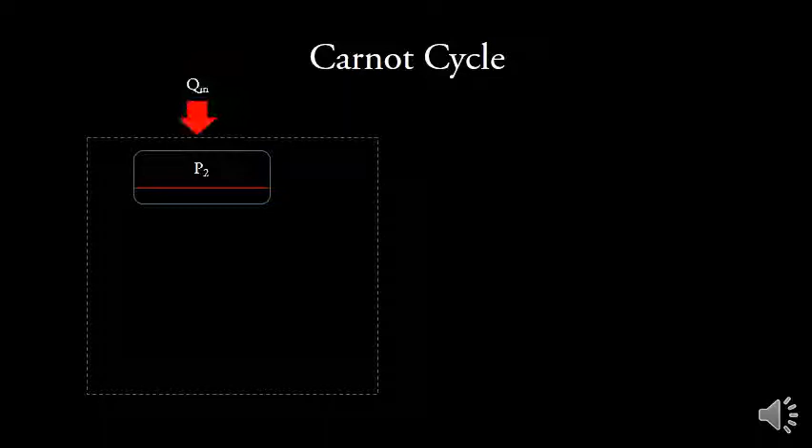gumawa tayo ng ibang mga paraan upang ma-utilize natin ang energy mula sa mga solid fuel, kagaya na lamang ng steam power plant. Sa power plant, meron tayong container. Ilagay natin doon ng tubig, and then susunugin natin ang ating solid fuel, say coal, at ang heat doon ay ating ilagay sa ating boiler.

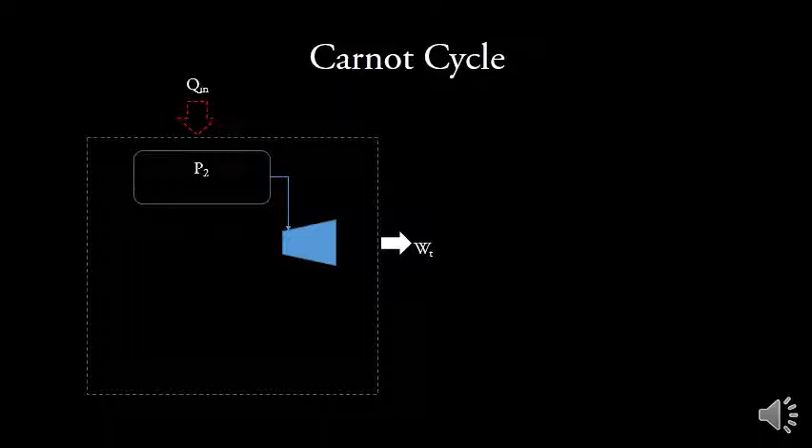So mag-vaporize ang ating water sa loob ng boiler at high pressure P2. Dahil mataas ang pressure na iyan, ay sapat na iyan upang paikutin ang ating turbine. So nag-expand doon sa turbine, and then ang ating turbine ay nag-generate ng work sub T or work ng turbine, and then ang condensate at ang vapor ay ipinunta natin sa ating condenser, kung saan atin naman itong i-condense.

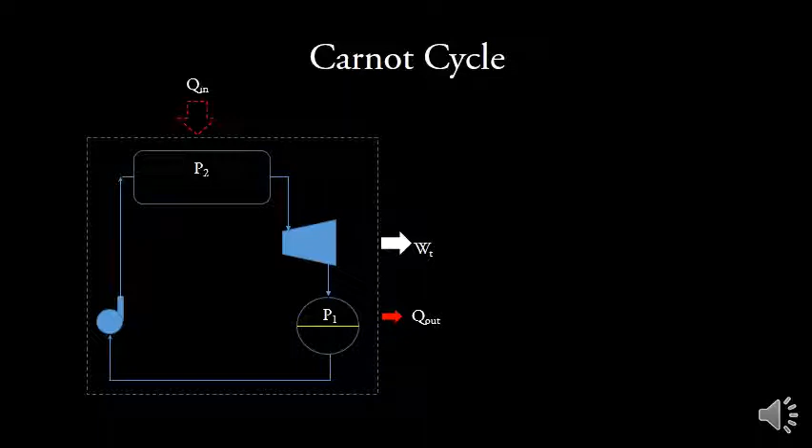Kapag i-condense natin, ibig sabihin hihigupin natin ang heat mula sa loob ng condenser. And then, i-pump natin pabalik ang ating water doon sa ating boiler. Kapag ito ay gumagana according to Carnot cycle, ito ang magiging hitsura nito sa ating TS diagram.

Meron tayong dalawang working pressure, higher pressure side and the lower pressure side. And then, kapag isabihin natin ang state ng water before entering the pump is state 1, sa Carnot cycle natin, it is somewhere here sa TS diagram.

And then, after exiting the pump, lalabas ito as a saturated liquid at point 2. So sa TS diagram, it is a saturated liquid. So tinansya natin na ang ating point 1 is such that after delivering the water to higher pressure, its state is saturated liquid. From point 2 naman, dinagdagan natin ito ng heat at nag-vaporize ang ating tubig from saturated liquid

to saturated vapor at point 3. So at point 3, the state is now saturated vapor. From point 3, in-expand natin ito sa ating turbine. And the turbine generates work, and the state of the water after exiting the turbine is state 4.

Ito po iyon. And then, from point 4 na naman, i-condense natin up to point 1. At point 1, ang state ng water natin is a mixture of liquid and vapor. Majority is condensate, pero meron pang mga vapor. Okay.

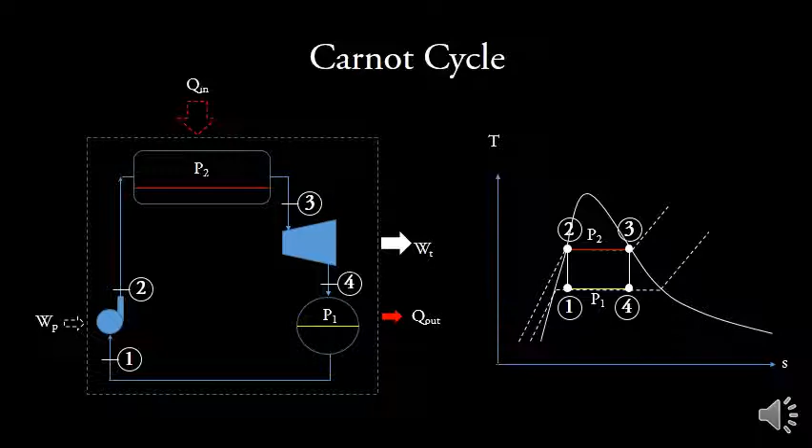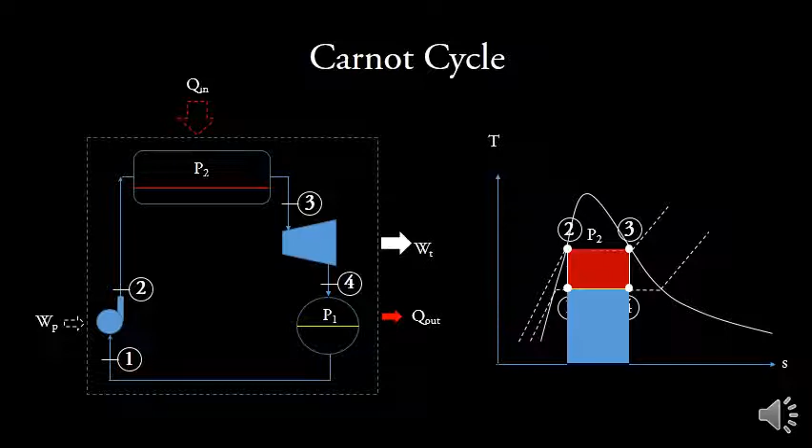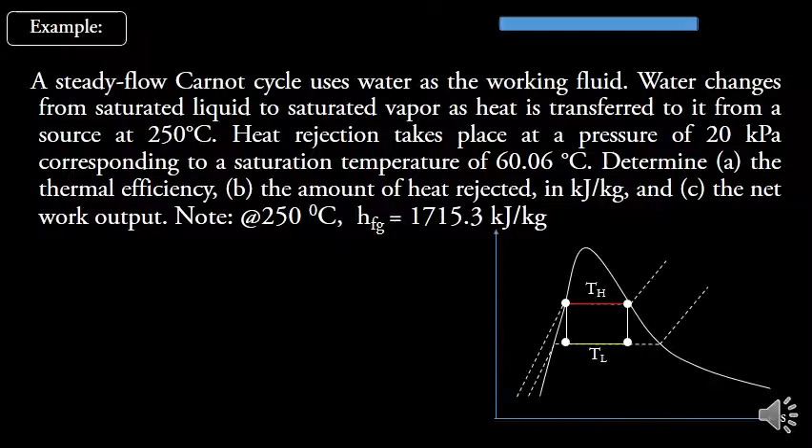Okay, mag-consider tayo dito ng halimbawa, meron tayong Carnot cycle. Ito yung mga proseso natin. Una, ang tanong dito is, ano ang thermal efficiency?

Okay, alam natin ang thermal efficiency ng Carnot cycle is 1 minus TL over TH. Meron tayong higher temperature, 250, at ang lower temperature naman natin is the temperature of the condenser, which is 60.06 degree Celsius. Given this value, ma-determine natin ang efficiency ng ating cycle, which is 36.3%.

Okay. Next is the amount of heat rejected and the net work output. But before that, unahin muna natin ang net work output. Dahil meron tayong efficiency at meron tayong meron tayong heat added.

Ang heat na added natin is the heat added from saturated liquid to saturated vapor. That is HF and HG. The difference of which is HFG. So, ibig sabihin, ang heat added natin is, that is the Q in. Ang value nito ay ang HFG natin, 1715.3 kJ per kilogram. So, makalculate natin ang work net natin, and that is 623 kJ per kilogram.

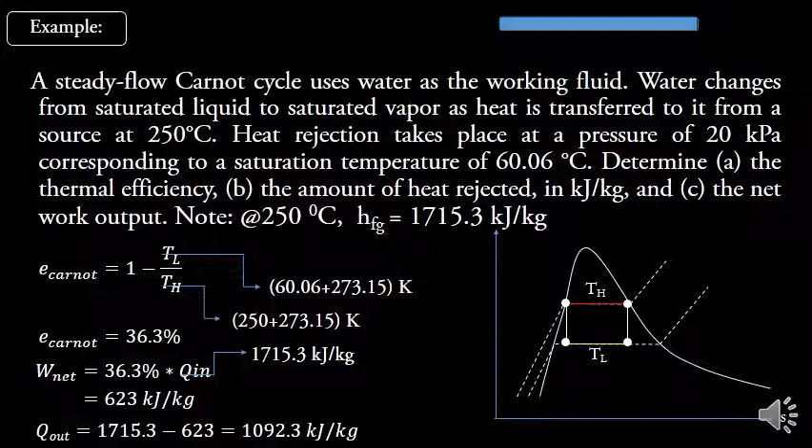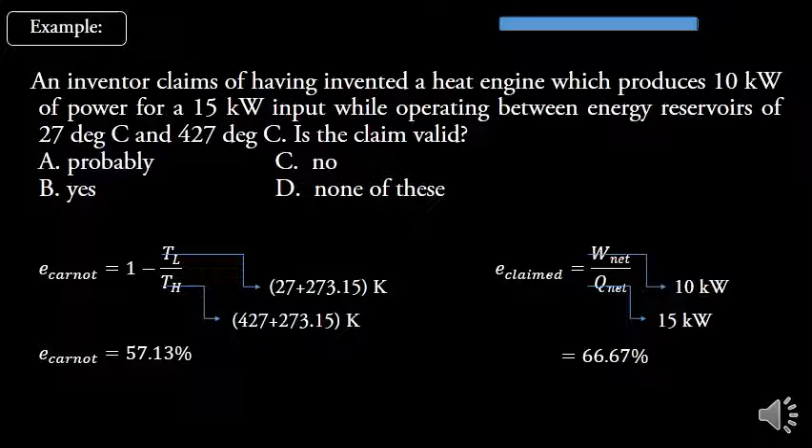Okay, so now let's discuss the Rankine cycle. We just modify our Carnot cycle from earlier, working on steam.

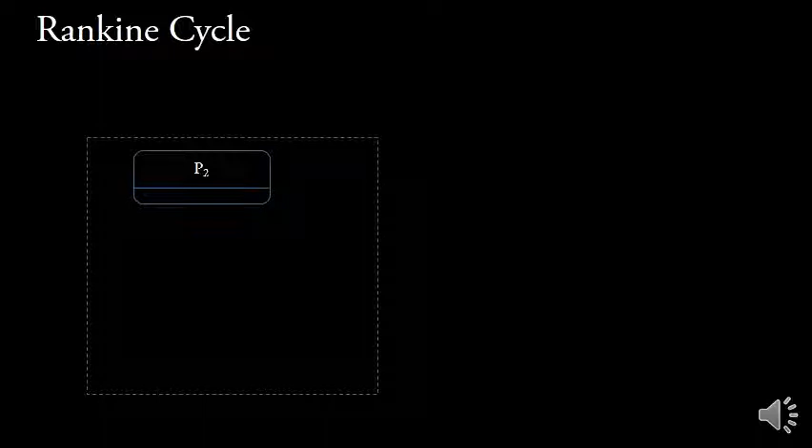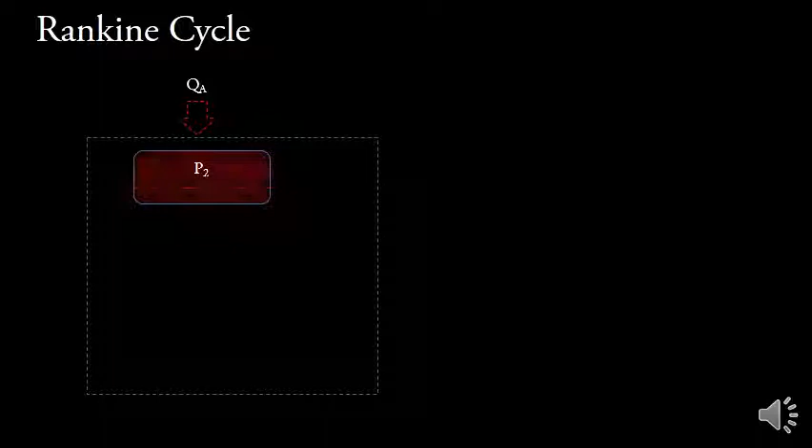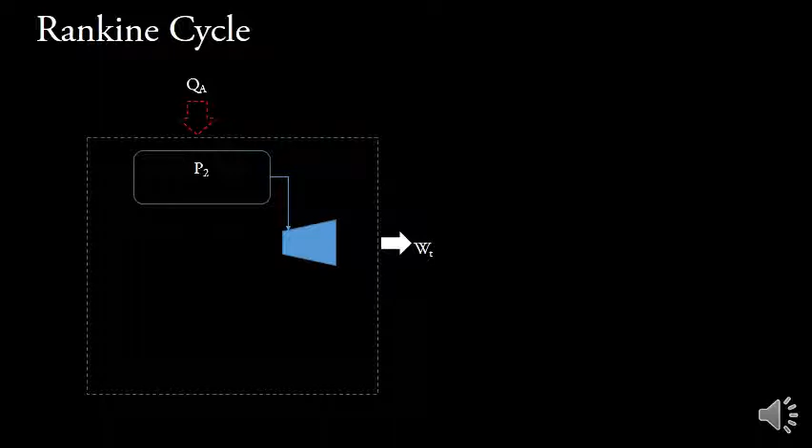Now we still have a boiler, regulated to a maximum pressure P2. We have liquid there, and then we heat it. The temperature rises until it becomes saturated liquid, until it vaporizes, until it becomes superheated vapor. When it becomes superheated vapor, we expand it in the turbine, which causes the turbine to rotate and produce work, WT. Then the vapor is sent to the condenser where we condense it.

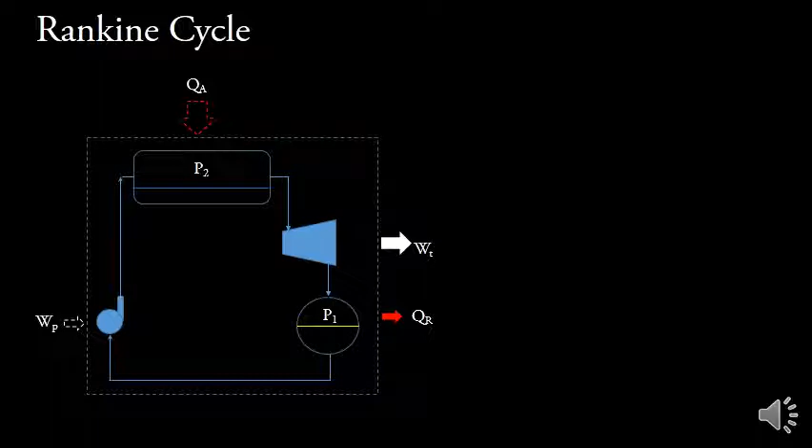Okay, on the TS diagram, this is how our Rankine cycle looks. We have two pressure limits, pressure P2 and pressure P1. Pressure P2 is the pressure in the boiler and pressure P1 is at the condenser. If state 1 is the state before entering the pump, on the TS diagram this is the condensate at pressure P1. From pressure P1, or from point 1, we pump it to a higher pressure. If the process is isentropic, meaning the process is vertical, the line from 1 to 2 is vertical.

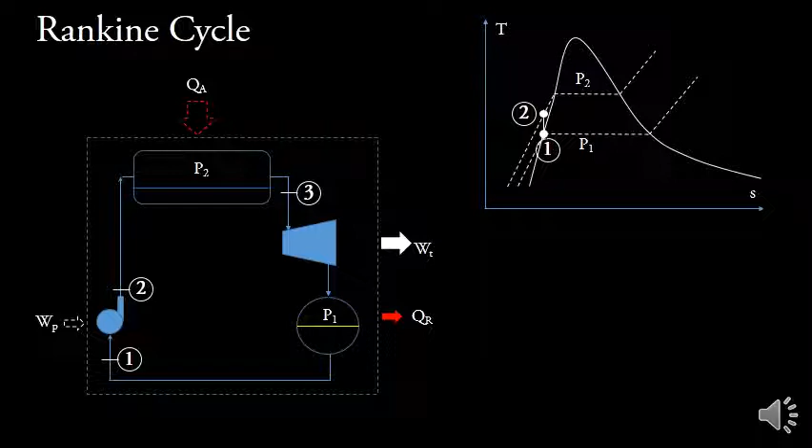After exiting the pump, the state of our water is at state 2, that's the vertical line intersecting the line P2. Then from point 2 to point 3, the water is heated in the boiler. First, the pressure and temperature rise to the saturation temperature of P2, then it vaporizes until it becomes saturated vapor, and then becomes superheated vapor. Then, once it becomes superheated vapor, we expand it in the turbine, which generates work.

Then at point 4, it could be a mixture of vapor and liquid or purely superheated vapor. Then from point 4, we condense our mixture into pure saturated liquid, or if possible, it should be subcooled liquid before we pump it to the boiler.

Okay, so let's determine the values we need to compute here. First, what is the output of the plant? But before that, let's first compute the other work done, such as the work of the pump. The work of the pump is mass times V dP, that is the work by the pump.

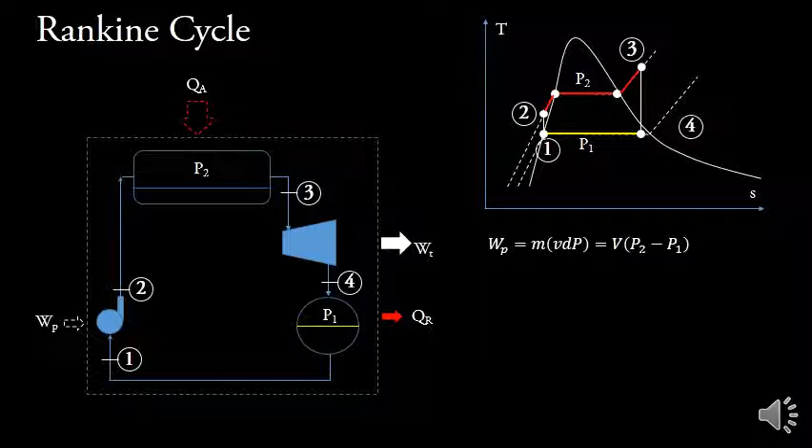Or we can rewrite this as, since mass times specific volume is total volume, we have capital V, and dP is the difference in the pressure, high pressure and low pressure, that's P2 minus P1. And the heat added is the change in enthalpy from point 3 and 2, so H3 minus H2 times the mass of the water.

Okay, what is the value of our H2? Unlike H1, which we can find directly in the steam table as the saturated liquid value, at point 2 we can compute it using the enthalpy at point 1 as well. That is the enthalpy at point 1, or the energy at point 1, plus the energy provided to the water by the pump, which is V dP. Our specific volume is the specific volume at point 1.

And then the heat rejected. The rejection process takes place from state 4 to 1, so we have H4 minus H1 times the mass flow rate. And the work of the turbine takes place from state 3 to state 4, we have H3 minus H4 times the mass flow rate of the water. Then we'll have the work net to be the work of the turbine less the work of the pump. And the efficiency can be calculated by work net over Q added.

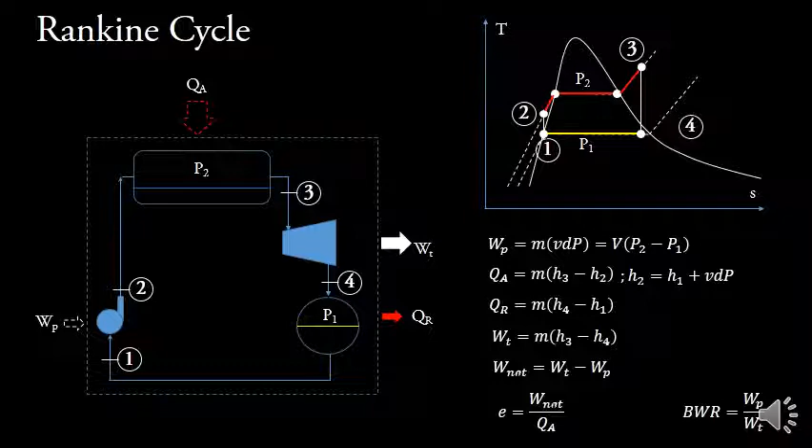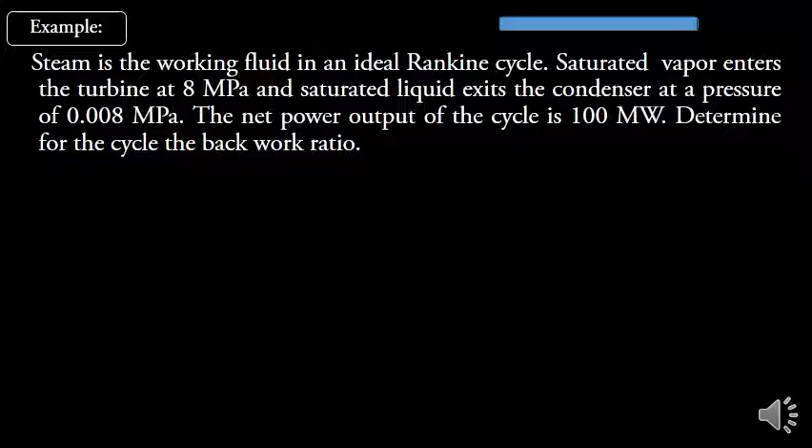Okay, i-determine natin ang back work ratio. So, back work ratio natin is work of the pump divided by the work of the turbine. So, work of the turbine is M times change in the enthalpy between 3 and 4.

Ang H3 natin is sa saturated vapor state, so titingnan natin kung ano ang kanyang enthalpy. Sakaling walang dalang steam table sa exam, dapat ang mga value na ito ay naibigay. Pero kapag hindi naibigay, ibig sabihin dapat merong naka-attach na steam table. Okay, titingnan natin ang value ng H3 mula doon sa ating steam table.

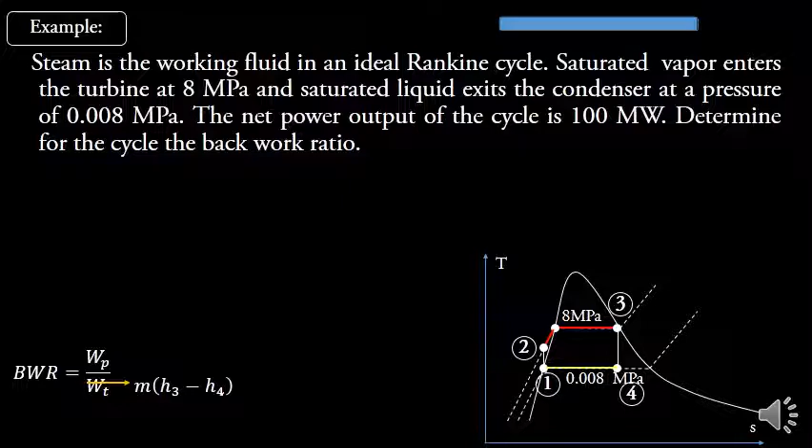Buksan natin ang ating steam table at titingnan natin ang value ng point 3. Ang point 3 natin ay saturated, so pupunta tayo doon sa part ng steam table kung saan merong column ng pressure at temperature na magkatabi. Kapag merong ganon, ibig sabihin, ang table na iyan is for saturated properties. And then, i-identify natin ang pressure or temperature. In this case, pressure na 8 megapascals or 8,000 kilopascals. Okay, ang gusto natin kukunin dito ay ang enthalpy at point 3, which is Hg, this column. Okay, ang value natin ng H3 is 2,774.55.

Okay, maliban dito, i-identify din natin ang isang property dito which is kakailangan natin in the future calculation, 5.7458, entropy natin yan, that is Sg, entropy of the saturated vapor. This correspond to this vertical line sapagkat ang point 3 at point 4 ay magkaparehas na entropy. So that line is 5.7458 na entropy.

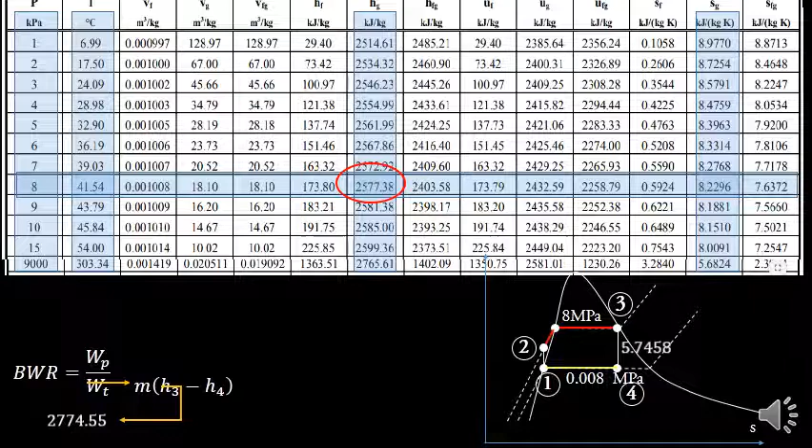Okay, so ang next natin i-identify ay ang H4. Ang H4 natin ay nasa lower pressure na, so binuksan natin ang ating steam table at lower pressure at hinanap natin doon ang 8 kilopascals. Pag titingnan natin ang point 4 natin, ang Hg natin dito is 2577.38. But this is not our point 4, this is the enthalpy of the saturated vapor at that pressure.

Okay, on the other side, meron tayong HF, enthalpy yan ng saturated liquid at that pressure. Okay, pero pag titingnan natin, meron din tayo ditong HFG. Merong ibang mga steam table na walang FG na property. Ang FG is the difference between the G and the F. Sometimes, pinoprovide ito para hindi na tayo mahirapan sa pag-compute. Ang HFG is the difference between Hg and HF.

So, kapag titingnan natin, ang HFG natin is that segment mula sa point 1 hanggang sa point red. So, ang point 4 natin, ang enthalpy, kapag i-compute natin ang enthalpy dyan, it must be the enthalpy at point 1, which is 173.8, plus the fraction of 2403.58. That fraction is called the quality. So, depende sa quality ng ating mixture, we can determine the enthalpy at point 4. So, the enthalpy at point 4 is 173.8 plus a fraction of the total length. Isulat natin dito, that is our H4.

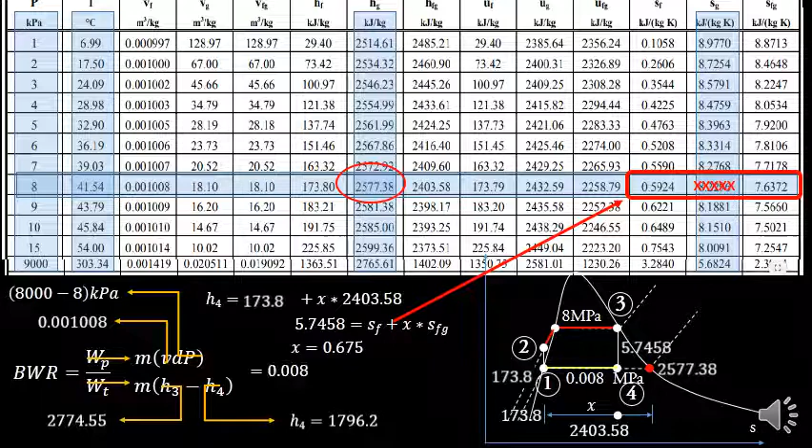Pointing to our steam table at 8 kilopascal, we look at VF, which is the specific volume of the saturated liquid. We have that value, and now our variables are complete. So we eliminate M, and we can compute that the backwork ratio is equal to 0.008.

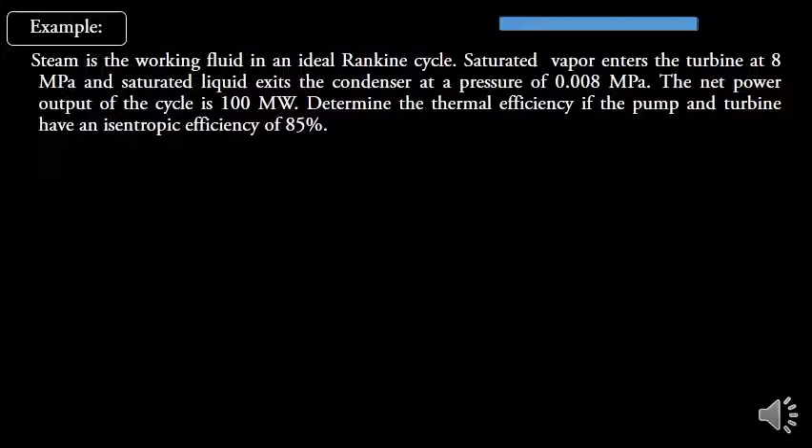So first, let's identify that the pressure difference is 8,000 minus 8, so that is our dP. And we have already identified point 1 with specific volume of 0.001008 and enthalpy of 173.8 from the previous problem. And we have not yet identified point 2, which is equal to H2.

To identify point 2, we have H2 equals enthalpy at point 1 plus specific volume at point 1 times dP. We have H1, we have specific volume, and we have dP, meaning we can calculate our H2. Now at point 3, we have already identified that from the earlier problem, and point 4 also, we've already identified that. Okay, so it's now complete.

We are now ready to compute the thermal efficiency. Thermal efficiency is the work net over Q added. Okay, our work net is already given, it's 100,000 kilowatt. But our QA is not given, but we know it is equal to the mass flow rate times the change in enthalpy between point 3 and point 2.

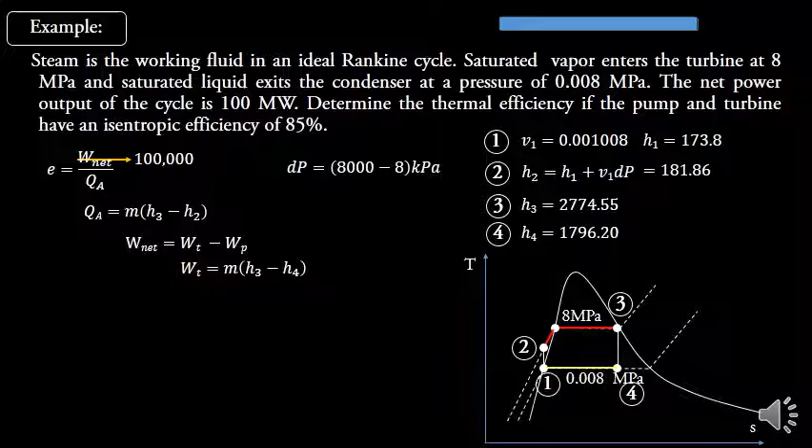But since the turbine is not 100% efficient, it is 85% efficient, its isentropic efficiency. That means only 85% of this energy will be converted into the work of the turbine.

And the work of the pump, the ideal work of the pump is equal to this formula: specific volume at point 1 times dP.

Okay. But because our pump is not 100% efficient, meaning only 85% of the work of the pump is converted into the energy of the water. Notice that our efficiencies here are not in the same position.

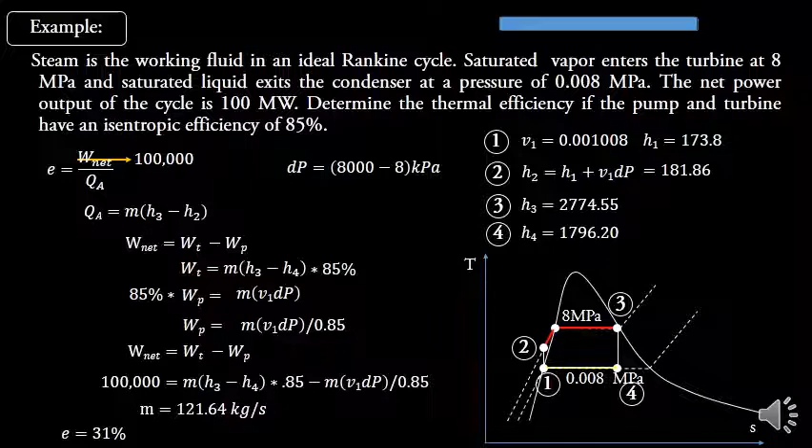And substituting everything into the original equation, we can compute QA, and substituting that above, we can compute our efficiency.

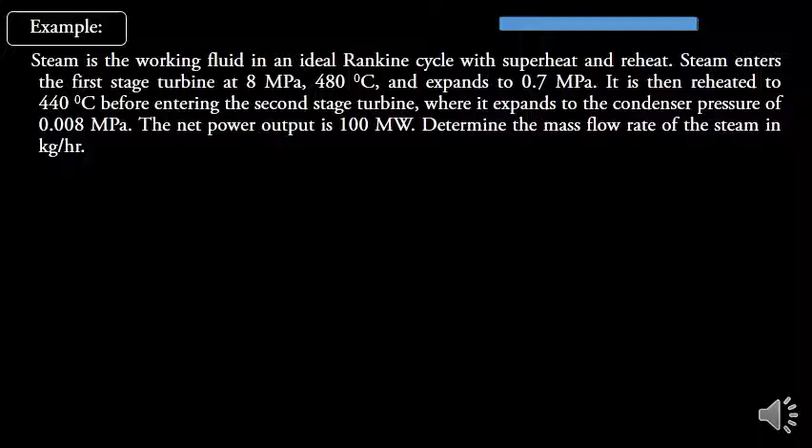Okay, unang-una at state 1, ang tubig natin is saturated liquid. We pump it to the pressure of the boiler at 8 megapascals. Pagdating sa 8 megapascal, ininit natin ito hanggang naging saturated liquid, hanggang naging saturated vapor, hanggang nag-superheat. The point 3 is a superheated state.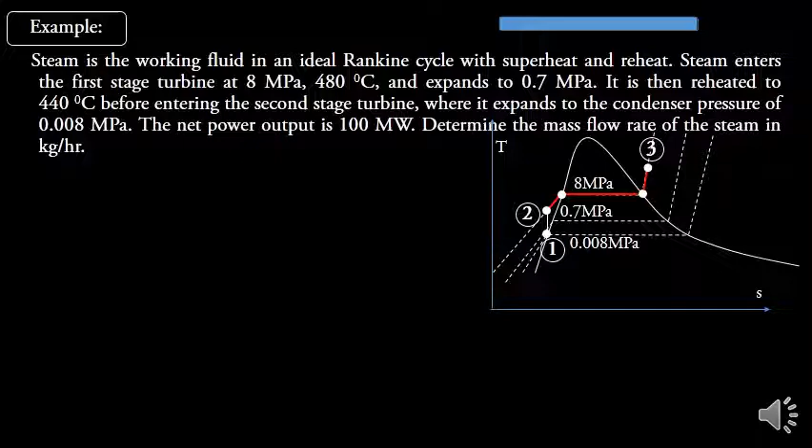From point 3 na naman, atin itong in-expand sa turbine, first stage of the turbine, and then that is point 4. And then from point 4 naman, atin itong ininit muli, reheat, that is point 5 at a lower temperature than state 3. Then from point 5 again, it is expanded to the final stage of the turbine, and then exits the water at point 6. From point 6 again, recycle natin ang tubig.

We condense it, and then we pump it to the boiler again. Okay, the working pressure of the pump is 8 to 8,000 kilopascals. So the change in pressure is that difference.

We have already identified specific volume 1 and H1 from the previous problems. We have already values for point 2 and for point 3. Titingnan pa natin yan sa steam table. At point 3, ang temperature natin dyan is 480 and it is superheated. Ang temperature 480, pressure is 8 megapascals.

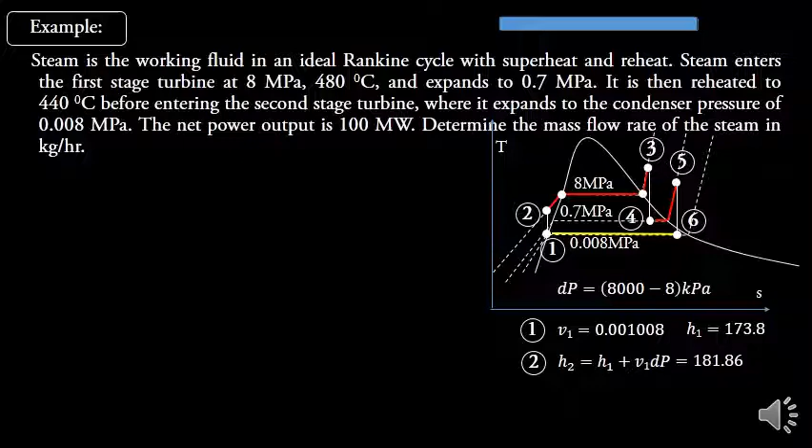Bubuksan natin ang ating steam table, particularly the superheated region. Okay, doon tayo sa table kung saan meron naka-label sa itaas na pressure. And then titingnan natin ang temperature na 480 para malaman natin ang enthalpy dyan. Okay, meron tayong 450, meron tayong 500. Walang 480. Meaning, ang enthalpy natin dyan must be between these two values also.

So makukompute natin ang H3 natin, which is 3,348.48 by interpolation. Hindi ko na i-detalye dito ang interpolation. Pakibalikan na lang ang video natin sa thermodynamics para sa interpolation. Doon i-detalye natin ang computation.

Okay, isa pang value na kukunin natin sa point 3, which is important for our later calculation, is the entropy. Here, using interpolation again, we have our entropy at that point is 6.6577. Okay, next, it is expanded to point 4.

Bubuksan ulit natin ang ating steam table. Pero titingnan muna natin ang superheated region ng 0.7 megapascals. Titignan natin dyan ang entropy. The entropy there, the lowest entropy there is 6.7. Compare that to entropy at point 3. The entropy at point 3 is 6.6. It is smaller than the entropy of the saturated vapor at 0.7 megapascal.

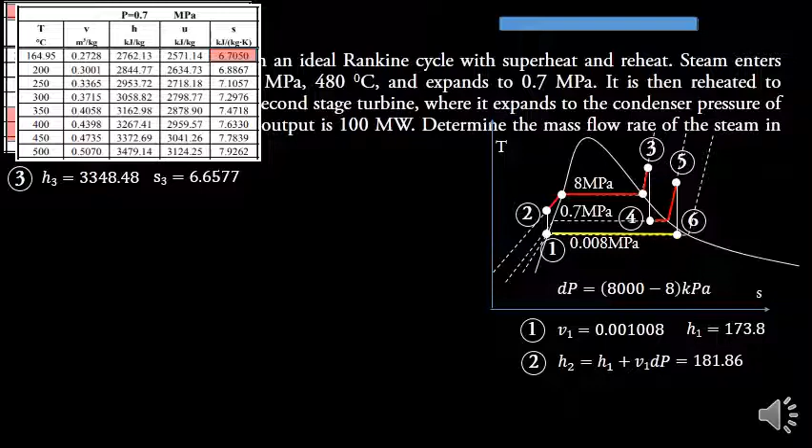Okay, sapagkat ang entropy sa point 3 papunta sa point 4 ay dapat magkaparehas. Since ang entropy dito na binigay sa superheated is mas mataas, ibig sabihin ang ating point 4 must be saturated. Okay, bubuksan natin ang ating saturated region kung saan titingnan natin ang 700 kilopascals, at titingnan natin ang enthalpy. So ito ang enthalpy ng liquid natin. Ito ang HFG natin. Given the HF and HFG, we can determine the value of H4, which is HF plus X times HFG.

Pero ano ang X natin? Ang X natin, makukompute natin yan given the fact that entropy at point 3 and entropy at point 4 are equal. Meaning, 6.6577 is equal to entropy of the saturated liquid at point 4 plus the SFG at point 4 and the HFG in that pressure times the quality.

Okay, the SF and SFG are here sa ating steam table. Substitute that to that equation, makukompute natin ang ating quality. Then substitute natin dyan sa original, then we can have H4 value.

Okay, next proceed tayo sa point 5. Point 5 again is a superheated vapor. So pupunta muli tayo sa superheated region at a temperature of 440. That is somewhere here. Again, by interpolation, makukompute natin ang H5 natin dyan to be equal to that value.

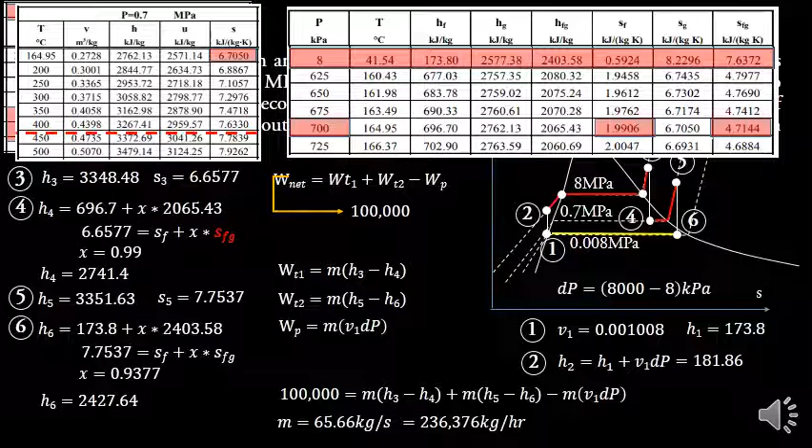Since all of that values are given except for the mass, it can be determined: 65.66 kg per second. Or in per hour basis, that is 236,376 kg per hour.

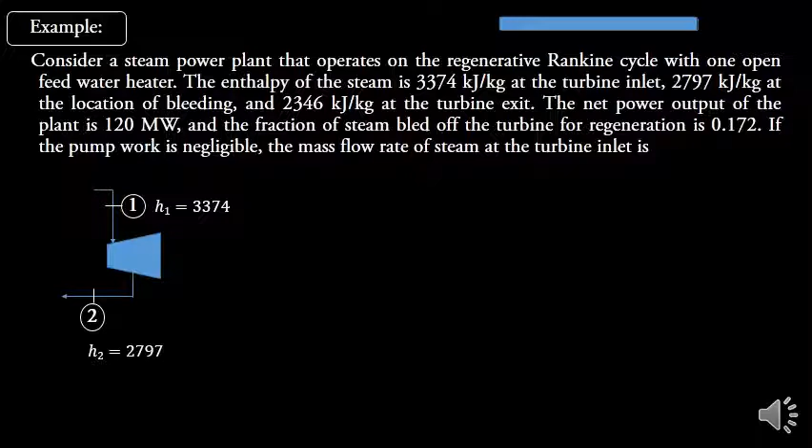Okay, so narito ang ating turbine. The water enters at point 1 with an enthalpy of 3,374. And then we have the bleeding at point 2 with an enthalpy of 2,797. And the water exits the turbine at point 3 with an enthalpy of 2,346.

The problem is asking for the mass flow rate of the steam. Since the mass flow rate of the steam is dependent, the output power of the turbine is dependent on the mass flow rate of the turbine. Then, meaning we can use the formula for the work output of the turbine.

Assuming that the mass flow rate at point 1 is m, then the mass extracted at point 2 is 0.172 of m. Then, we can calculate the work of the turbine as the energy released or absorbed by the turbine from point 1 up to point 2. And that is equal to that formula: the difference in the enthalpy from point 1 and point 2 and the mass flow rate during the expansion of the mass m from point 1 to point 2.

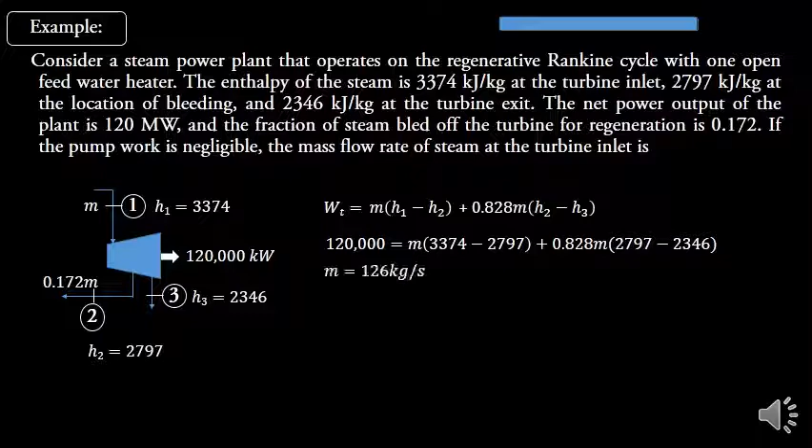Aside from that, the turbine also absorbs energy from the expanding steam from point 2 to point 3 with an enthalpy change of H2 minus H3. At that point, the mass flow rate is now 0.828 of m, which is a net of 0.172. Okay, so we have the work net of the turbine and we have also the value of the enthalpies. So our only unknown here is m. So makompute natin ang m natin and that is equal to 126 kg per second.

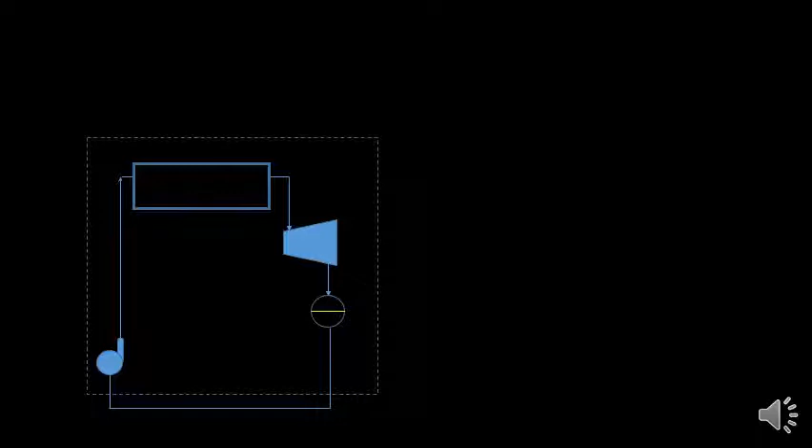Okay, so pupunta naman tayo sa geothermal power plant. Ang geothermal power plant ay power plant na kina-convert ang geothermal energy into electricity or any usable energy. Kanina sa ating steam power plant, meron tayong boiler, meron tayong turbine, meron tayong condenser, at meron tayong pump.

Sa geothermal power plant, dinidrill natin ang crust hanggang maabot natin ang certain depth, like say 4 kilometers up to 6 kilometers. At that depth, medyo mataas na ang temperature doon sapagkat malapit na ito sa mantle kung saan nandun ang molten material na masyadong mainit kagaya ng lava or magma.

Sa ilalim ng lupain natin ay meron ding mga tubig doon na naka-stuck, dahil sa ilang taong pag-uulan na ipon doon sa ilalim. At kapag i-drill natin yon, dahil sa mataas na temperature doon at mataas na pressure ay itutulak ito paitaas. So kapag dinrill natin ang ating crust at that depth, makukuha ang ating high pressurized water with high temperature at i-expand natin ito sa ating tinatawag na flash separator.

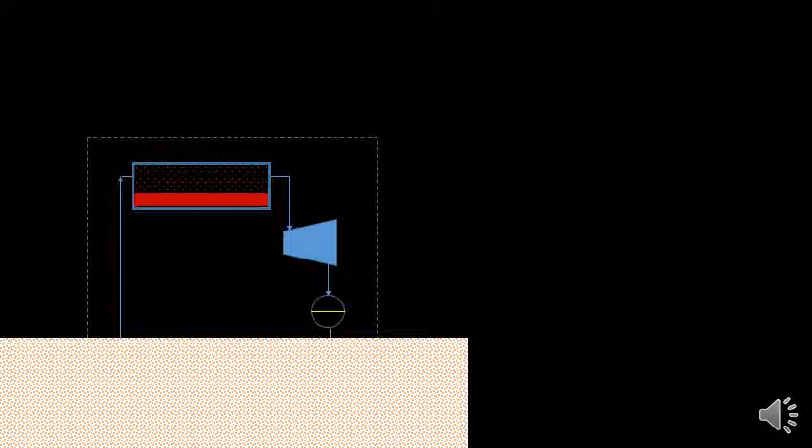Pag-expand ito sa flash separator, magkakaroon ito ng pagsisiseparate ang liquid and vapor. Ang pressure nito ay mataas. Ang vapor natin ay siyang gagamitin natin para doon sa pagpapagana ng ating turbine. At pagkatapos, i-condense natin ang ating vapor at i-inject natin ito pabalik sa ating earth. Samantala, ang condensate naman sa ating flash separator ay ating ding i-inject pabalik sa earth.

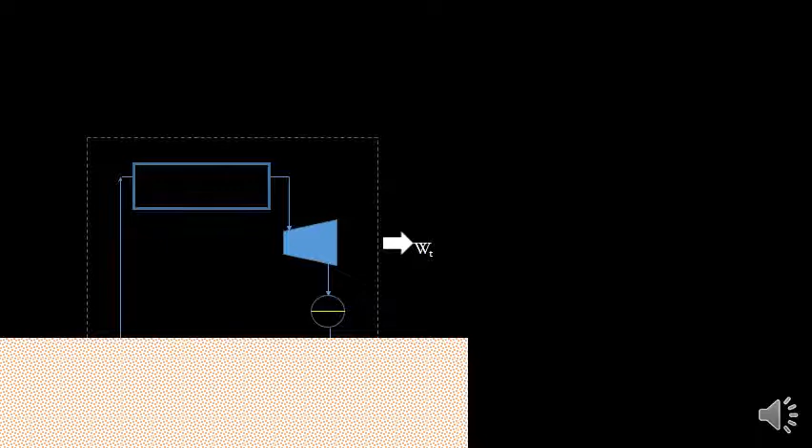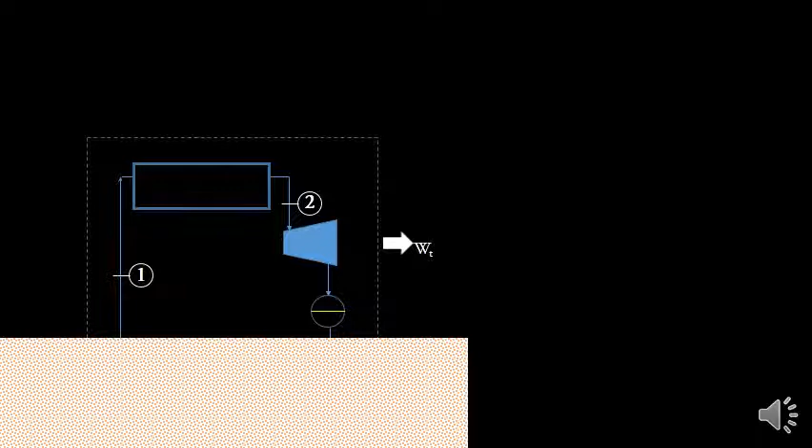Okay, so ang geothermal power plant ay may mas simpler na schematic diagram kumpara sa ating steam power plant. Pag titingnan natin ang ating TS diagram, ito ang state ng tubig bago ito na-flash doon sa ating flash separator. Ito naman ang state ng tubig nang nag-expand ito sa ating turbine. Ang state ng tubig na yan ay saturated vapor. At ang state 3 naman is yung lumabas na sa turbine. Sa TS diagram, ito ang kanyang itsura.

Point 1 is the state of the water. Ang state na ito is actually a compressed liquid, but its property is close to the property of a saturated liquid, kaya nilagay lamang natin ito as a saturated liquid. That is a high pressure state. And then, ipinasok natin ito sa flash separator at a lower pressure, but still enough to generate power on the turbine.

And then, i-flash natin yan. When we flash it, ibig sabihin ang ating enthalpy is the same. Kung ano ang enthalpy sa point 1, ang final enthalpy nito after flashing is still the same. Okay, then that is our point 2. Our point 2 is the saturated vapor. Yan ang kakailangan natin upang patakbuhin ang ating turbine.

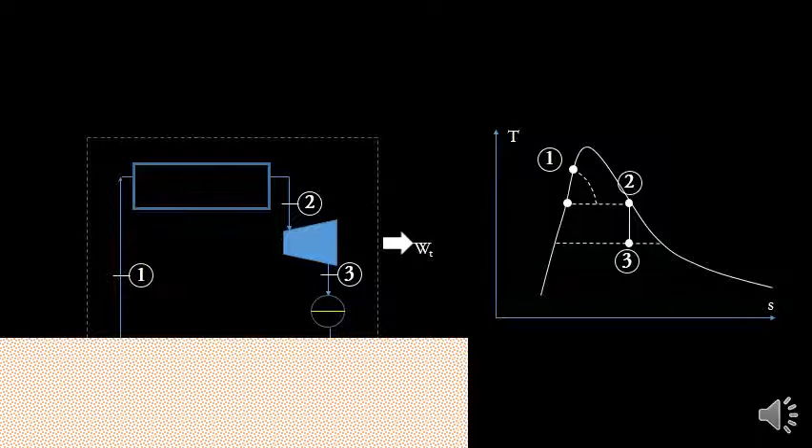And then the water exits the turbine at point 3. And then atin itong i-condense and then inject back sa earth. Okay. Ang work ng ating turbine is the change in energy from point 2 to point 3, where the enthalpy at point 2 is the enthalpy of the saturated vapor at that pressure.

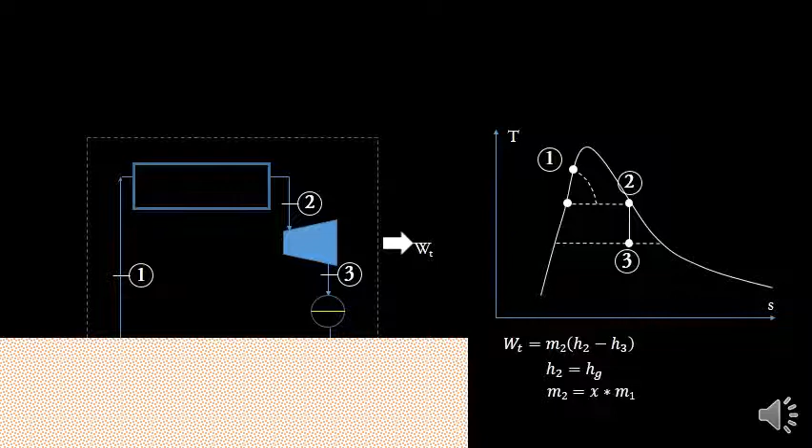And the mass flow rate of M2 is the fraction of M1. Sapagkat hindi naman lahat ng tubig na drill natin ay nagiging vapor, iba nito ay nagiging condensate. So ang gagawin natin dyan ay i-determine natin kung ano ang X, which is the quality. X is the amount of vapor, so it's a fraction of M1.

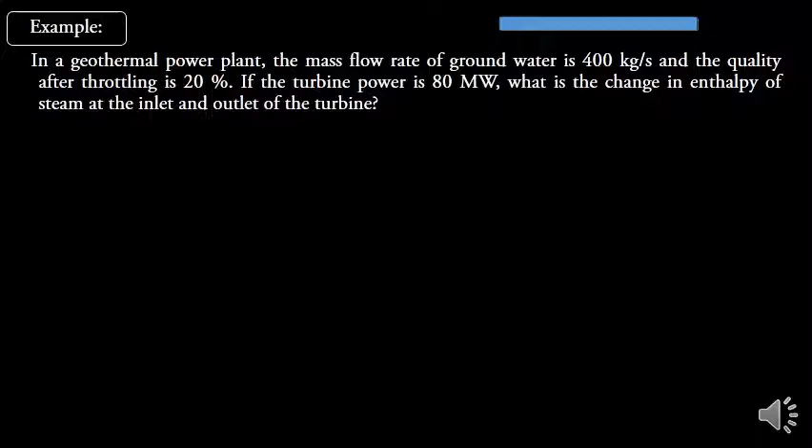Okay, so ito ang ating TS diagram para sa ating geothermal plant. I-determine natin ang work ng ating turbine. May net work ang turbine, which is 80 megawatt. Ang tanong ng problem is, what is the change in enthalpy from point 2 to point 3?

Okay, so alam natin na ang ating work net is 80,000 kilowatt and equal to M2 times the change of enthalpy between 2 and 3. But what is M2? M2 is a fraction of M1. A fraction is called the quality. So i-determine natin muna kung ano ang quality.

We can use that by comparing the enthalpy of point 1 and at point 2. Pero sinabi sa atin ang quality. The quality is 20%, so meaning 20% of 400 is the mass of the vapor. So the mass of the vapor is 80. So we can determine the change in enthalpy to be equal to 1000 kilojoule per kilogram.

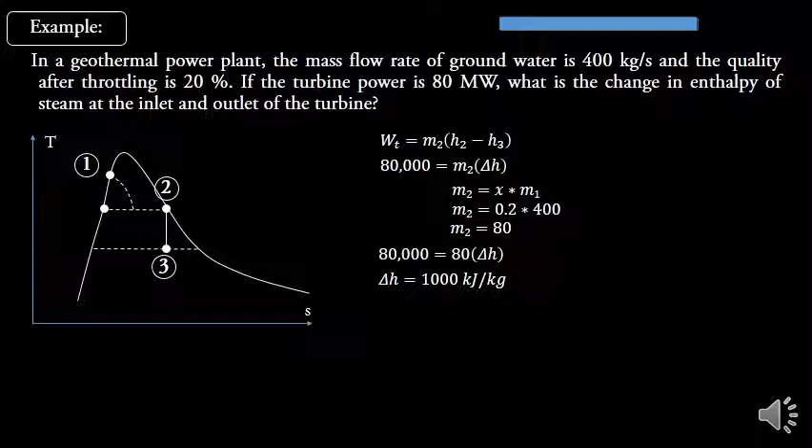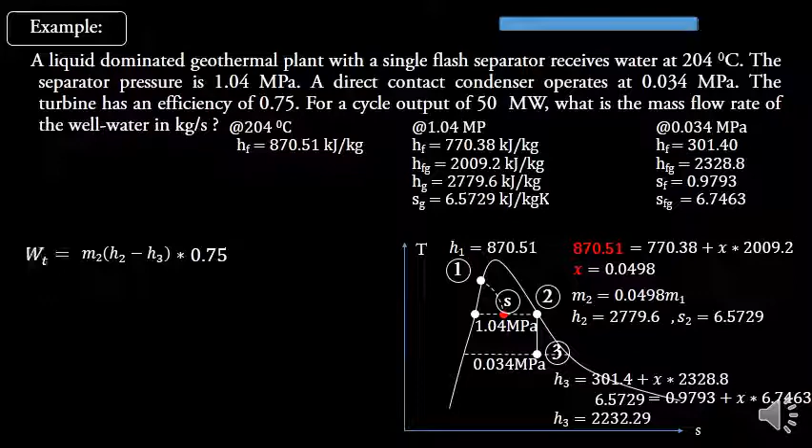Ang work done ng ating turbine is the energy change from point 2 to point 3. But the turbine has an efficiency of 75%. This energy is the maximum ideal if the turbine is 100% efficient. Since the turbine is not 100% efficient, it means that the energy that is absorbed by the turbine is only 75% of that available energy from the steam. And that is the work done by the turbine, which is equal to 50,000.

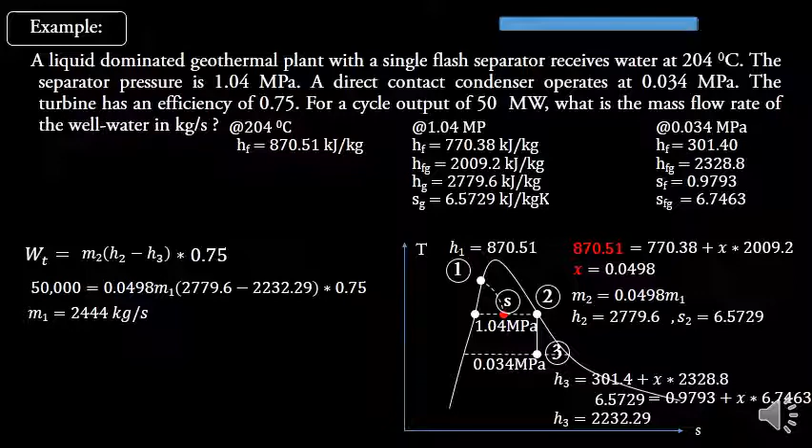Since M2 is equal to 0.0498 M1, and our H2 and H3 are also given, then we can determine M1 to be equal to 2,444 kilogram per second.